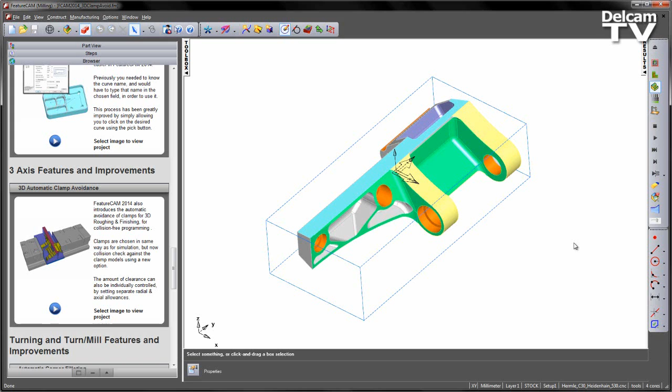FeatureCAM 2014 introduces automatic avoidance of clamps and fixtures for 3D roughing and finishing. The ultimate aim is to make collision-free programming as easy as possible.

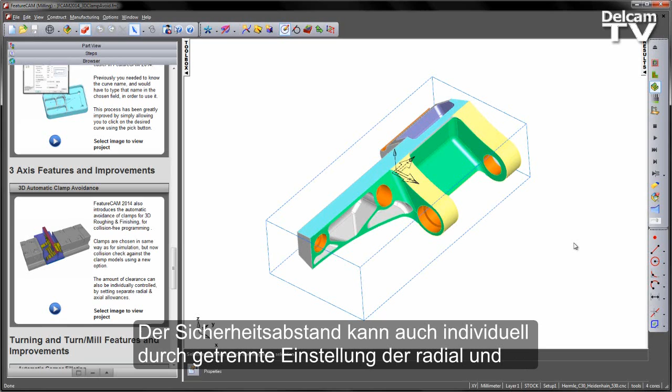Clamps are chosen in the same way as for simulation, but now we collision check against them using a new option in the machining attributes. The amount of clearance can also be individually controlled by setting separate radial and axial allowances.

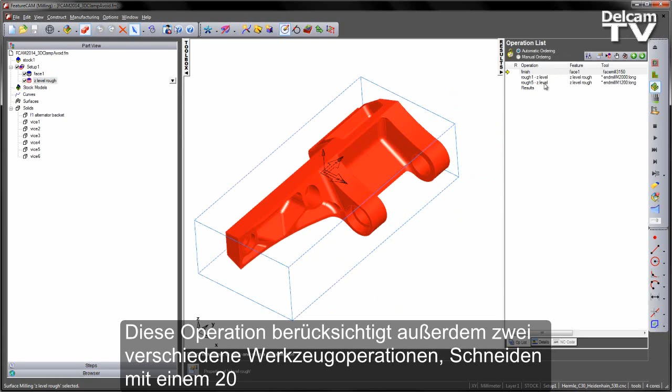In this example, we have an alternator bracket that we wish to machine. If I go to the part view, you'll notice we have a facing operation and a Z-level roughing operation over the entire part. This operation also takes into account two different tooling operations, cutting with a 20mm tool and a 12mm tool.

If we go ahead and play a 3D simulation of this, we can see the toolpath works its way down through the components like so.

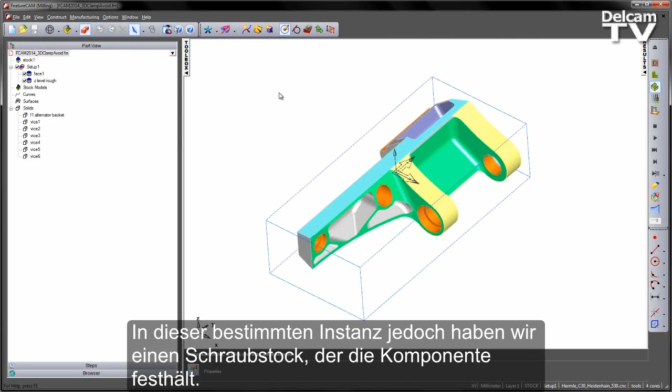However, in this particular instance we have a vice that's holding the component down. If I go ahead to my layer dialog, turn on the vice layer, set the shading on, we can see the size of the vice and the position of the component like so.

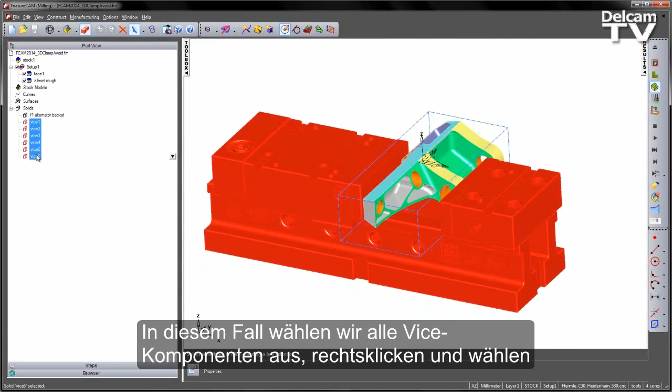In this case we're going to select all of the vice components, right click and say use solid as clamp.

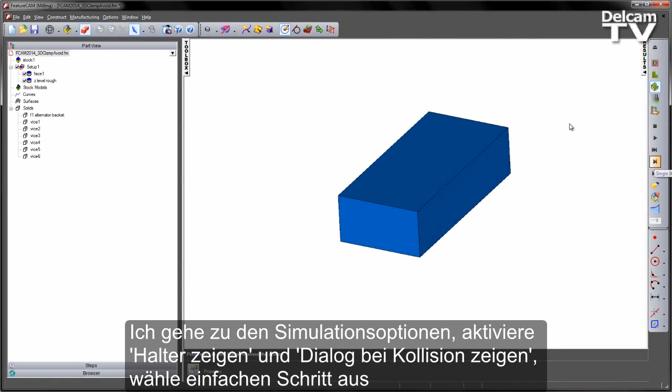Now when I simulate, if I go and turn on my holder and my collision checking, do a single step, my vice appears in simulation and I can play my simulation through.

However, as I get so far down the component, you'll notice the tool is starting to gouge with the vice, and will continue to do so unless I make some changes to my toolpath.

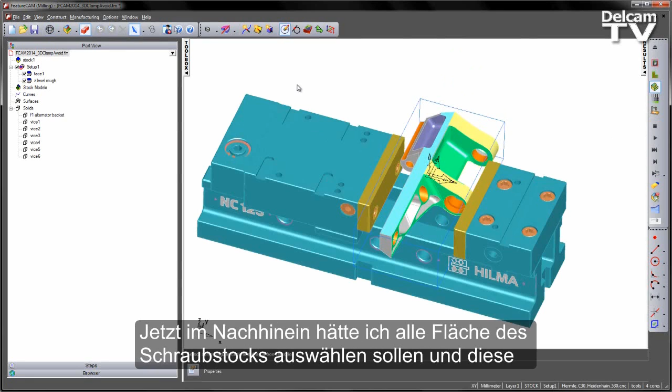Now in the past I would have had to select all the faces of the vice and do some kind of collision checking against them. Now I can go to my manufacturing options, into the machining attributes, and under the milling tab we have a new button that says clamp avoidance.

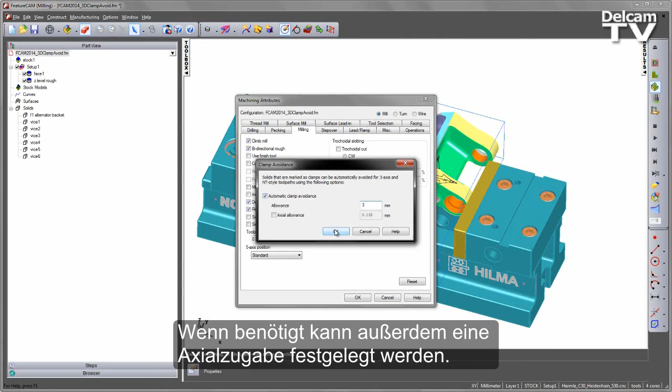By selecting this I can turn on my automatic clamp avoidance, and I can set an allowance value. In this case I'm going to set it to be 3mm. We can also choose a separate axial allowance if we wish to do so. By selecting this option, the original allowance becomes the radial allowance.

Let's say OK to that, and accept, and recalculate the toolpath.

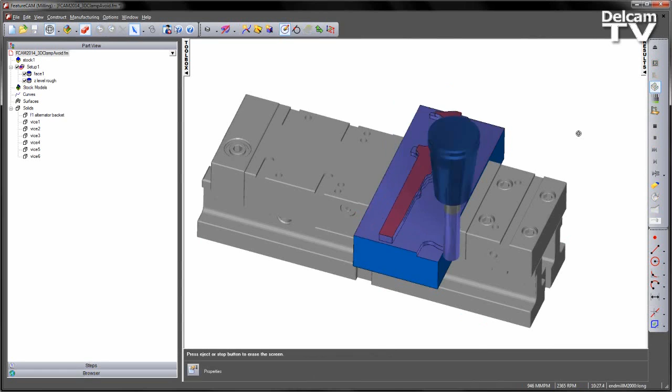So now we can see, as we recalculated the toolpath, we've left material around the vice and got a collision-free process throughout.